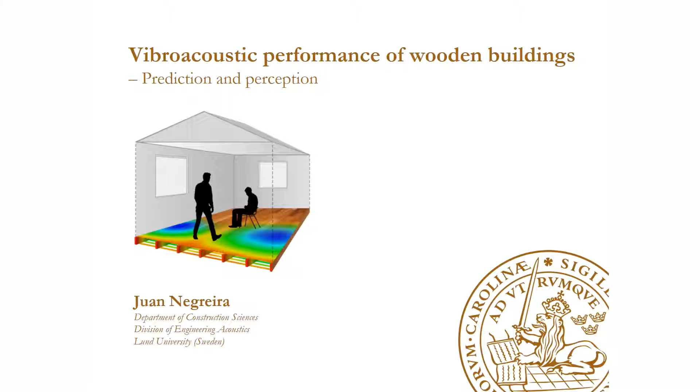as a PhD student. So I'm going to try to do it in a very descriptive and non-technical way. If someone has a question afterwards, I'm willing to happily go into the details.

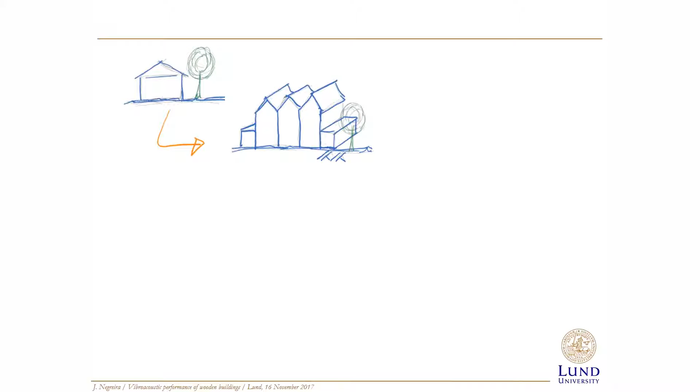But to start with, this is a house which could be made of any material. This is how people used to live many years ago, isolated from each other, growing their own products, going out in the morning, hunting, coming back in the evening. But as society evolved, people started to gather together and create populations. That became even more important, even more evident after the industrial revolution. Then cities started growing and people started living all together, building vertically, close to each other, cities started densifying.

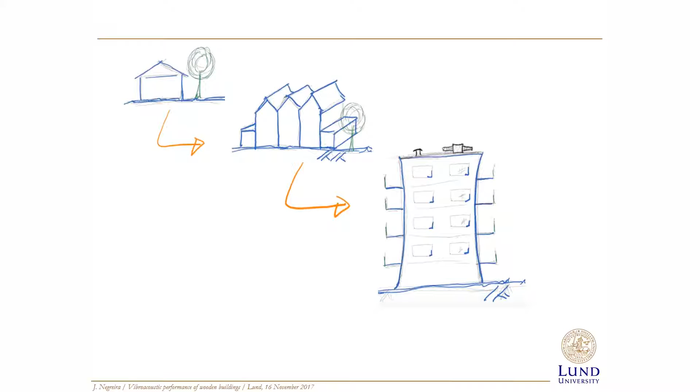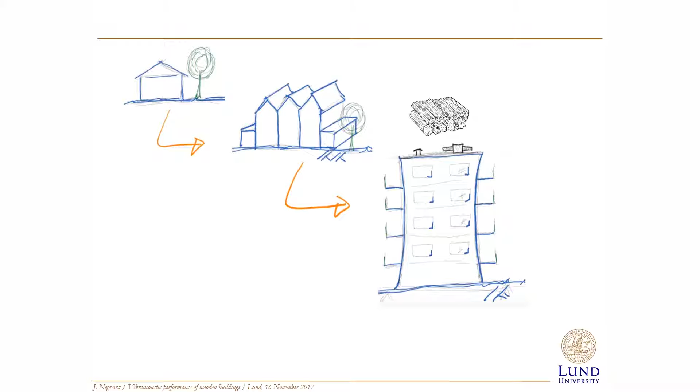And nowadays, especially in Sweden, those high-rise buildings - just because Sweden is the third largest country in the European Union and 70% of it is forest - in Sweden, many of these buildings, and growing, are made of wood. The problem is that even though they comply with the present acoustic regulations, as Nikos talked about before, people still complain.

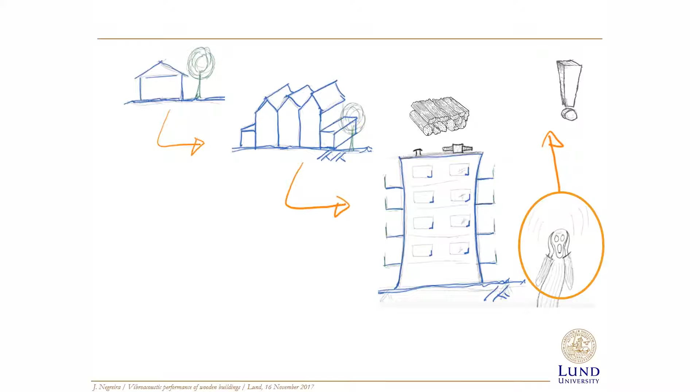They say, yeah, they may pass the regulations, but I'm not happy here. So one first kind of objective of my thesis was to try to understand why people complain about that. So the first aim was to try to find design indicators of how humans perceive vibrations.

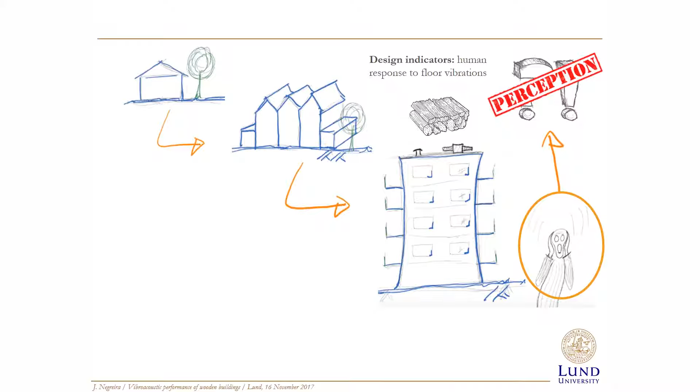I focused quite much on the low frequency range. Well, the other point of my dissertation - you have to believe me on that - but there is a big difference whether in one building we use some type of floors or some other type of floors and stuff like that. Whereas this is quite easy to predict in heavy structures like concrete.

Wood is a natural material. It's very unpredictable. It depends quite much if you have knots, if you have resin pockets and stuff like that. So due to that variability, it's quite hard to predict the behavior of a wooden structure.

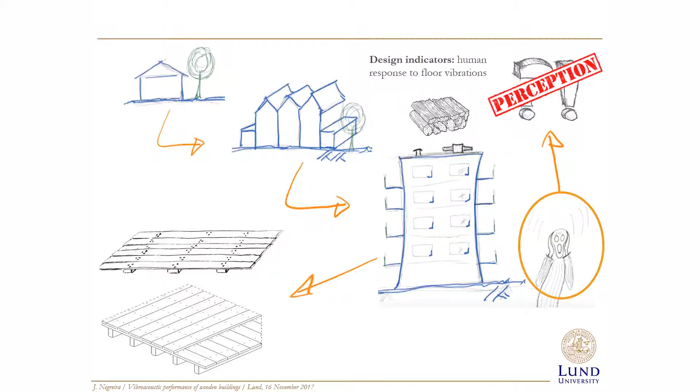So therefore, the second aim of the thesis was to try to create and develop computer models to try to predict the vibroacoustic behavior of these buildings during the design phase. If that ultimately could be achieved to some extent, there would be cost savings for the industry, and ultimately vibroacoustic comfort could be achieved by the inhabitants.

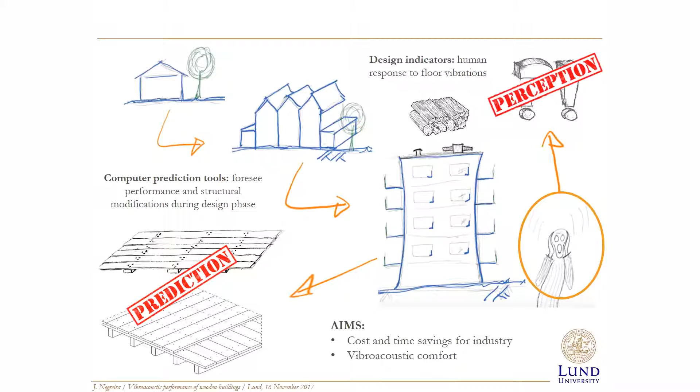So this is everything which was driven at during the 5 years PhD. I will just go a bit more deep into the details. So the title was Vibroacoustic Performance of Wooden Buildings, Perception and Prediction.

So wooden multi-story buildings in Sweden were allowed during many years, but due to numerous urban fires during the 1800s, they were prohibited, and that century-old ban was lifted in 1994. All of a sudden, those buildings started growing in popularity, just increased market share, just because wood is very cheap, is very abundant in Sweden.

It allows a high degree of prefabrication. That means that you can build indoors as in a factory, transport it to the building site and just put up a puzzle as a building, and that is very important in a country with bad weather like Sweden. And it's environmentally friendly, so it has a lot of advantages.

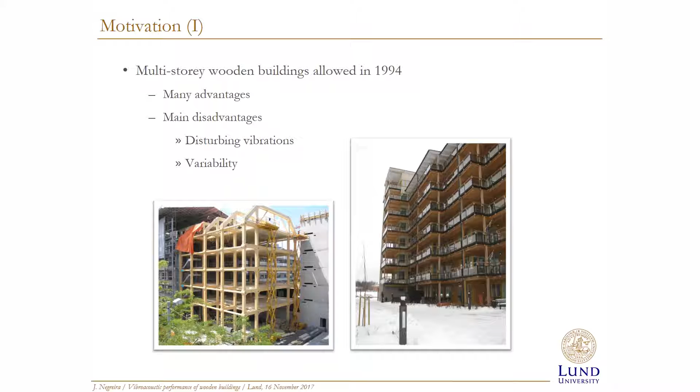But as I said, we have two big problems in the field that I'm dealing with, which is the variability, and due to that, the acoustic comfort. So we can distinguish in any building, but now focused on wooden buildings, two types of sound transmission. One which is called airborne sound, which is where most of the sound energy is transmitted through air.

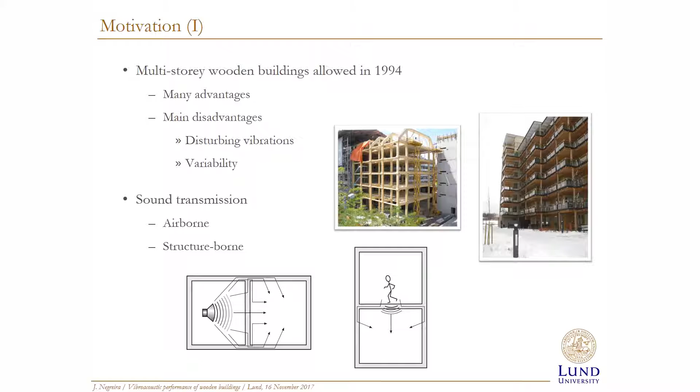I speak, then it goes and my voice hits a wall and radiates to the other room. That is airborne sound. And there is another one which is impact sound transmission, which is the sound that we hear down here when someone up above us strikes directly the floor. It can be people walking, it can be objects dropping, it can be any source you want.

Nowadays, the current ISO standards - and now I'm going to focus on impact sound because it's the one which has more importance, or that is more critical in wooden buildings - the current ISO standards in Sweden, and Sweden is the only country in the world which accounts for frequencies below 100 Hertz.

The only country in the world that counts frequencies from 50 hertz to 3,150 hertz in impact.

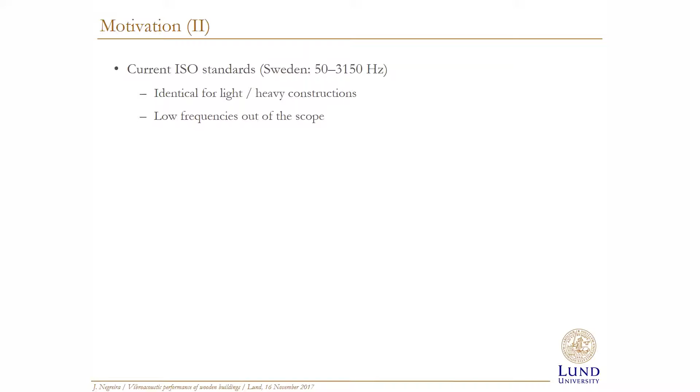The problem with those ISO standards is that they are identical for concrete heavy buildings and lightweight buildings. When they were developed, they were made just for concrete buildings, because wooden buildings were prohibited. So when wooden buildings were reintroduced, they said, but we use the same norms.

The problem is that the low frequencies are out of the scope, frequencies below 50 hertz. That means they're not accounted for, and that could trigger some type of problems.

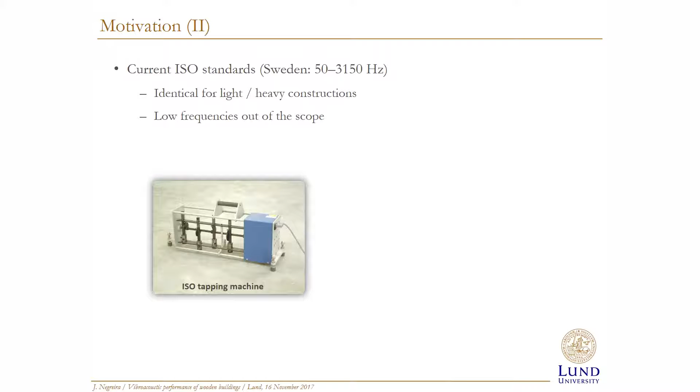This is an excitation source called the tapping machine, which has like 5 hammers that alternatively hit the floor, and then you measure the sound down in the room below. So using this source, you can assess how good your floors are against impact.

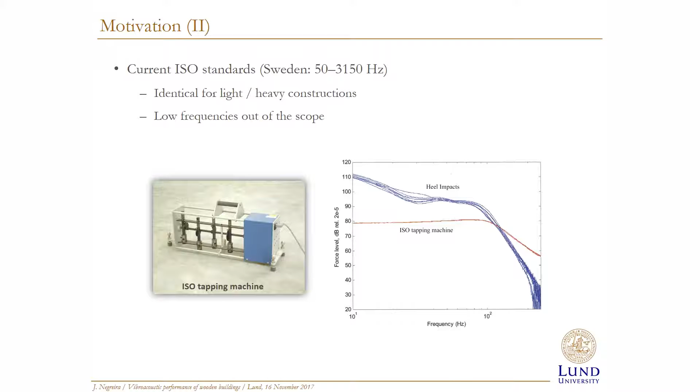If you compare the force that these tapping machines create against daily activities, this is a plot from a Norwegian researcher called Anders Homb. You can see that the force the tapping machine creates underestimates very much the heel impacts from daily activities in wooden buildings. Looking at frequencies below 100 hertz, the daily activities are much higher than what you could evaluate or predict with this tapping machine.

Based on that plot and other things, there was this Swedish research project I was involved in called AkuLite, where we measured impact sound from 50 hertz to 3,150 hertz in wooden buildings, and then asked people via questionnaires how they felt about living conditions there.

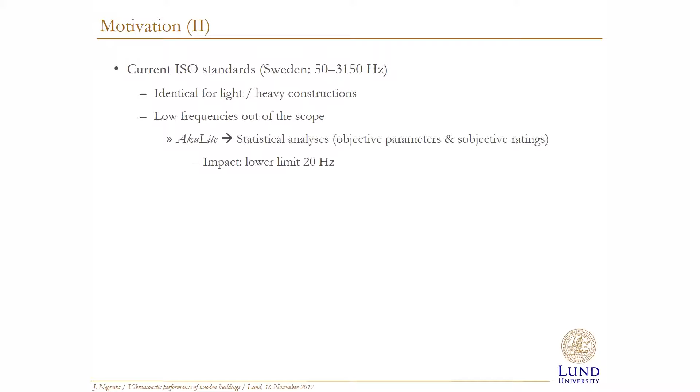If we compare those standardized indicators from impact sound, which go above 50 hertz, with people's responses to questionnaires, the correlation was around 52%, the R-squared correlation statistically. Whereas if you include frequencies down to 20 hertz, the correlation skyrocketed up to 83 or so.

That points out that in wooden buildings, when they are very light and easy to put into movement, low frequencies are of importance.

Then another question is, how do you address those frequencies below 50 hertz? Are those vibrations? Are those sound that you can measure with a microphone? That's another question.

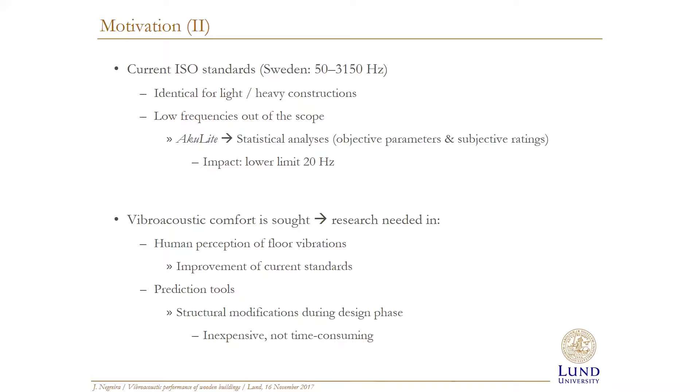The whole point was that if vibroacoustic comfort is to be achieved in these types of buildings, focusing on the low frequency range, we have to dig more into human perception of vibrations, improve the correlation with the standards, and develop prediction tools that can predict the behavior of a building before it's actually erected, saving time and money for the industry.

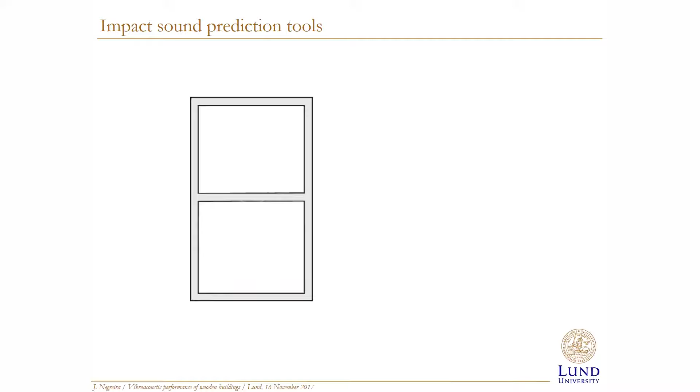So if you are to develop a prediction tool to see how people perceive sound, you have to work on 3 aspects. One is the excitation sources. If we are to create computer models that predict the actual impact noise, how do we model those sources accurately in the computer?

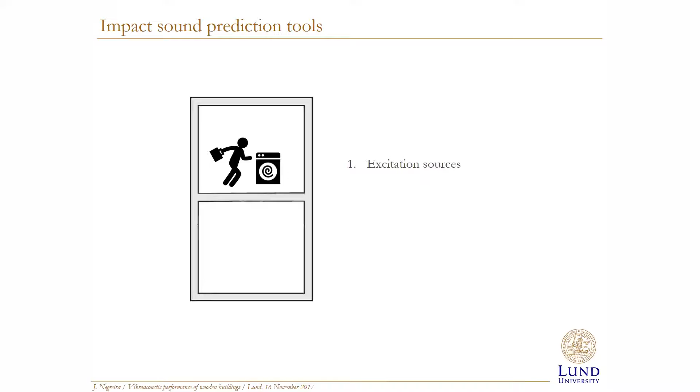Second, how do we model the floors? Wood is a very orthotropic, variable material that has to be thoroughly thought through, because it's not that straightforward, it's not homogeneous. So one has to dig into how to model the actual floor construction.

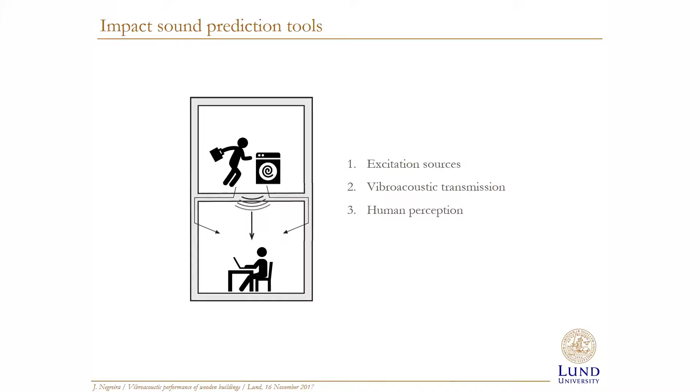Third, once that sound travels from the excitation source to the room below, how do people perceive that? This is a graphical summary of what I did during the PhD dissertation, which I'll come back to during the whole presentation.

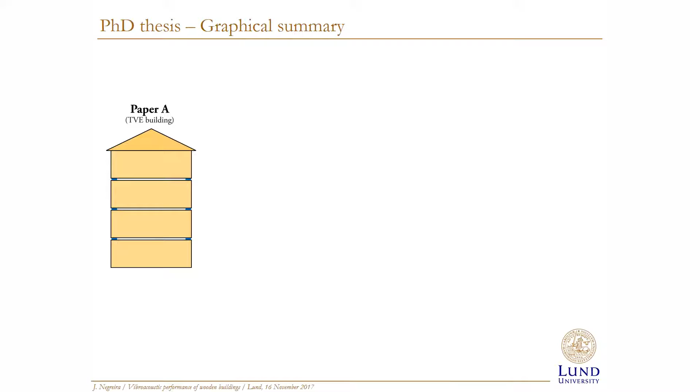But we tried to start at the big picture: I'm going to model a building. The first conclusion was, you cannot do that, this is too complicated a thing. So take a step back and look into different details before trying to put up a whole building.

So in one of the papers, what we looked into was some kind of elastomers. In the first paper, paper B, what we looked into: normally a wooden floor is made of a flat surface, and then you have beams and stuff like that.

The calculation time of those floors, when I put some kind of excitation in them, will depend very much on what you model. So the first thing was: in order to be accurate but not spend too much time, how much level of detail do we have to consider? Do we need to model the air between the cavities, between beams and plates? That was one thing we looked at.

The second thing was that there are a lot of modern constructions, types of buildings that use some type of rubber materials between floors and walls in order to reduce vibration transmission, flanking transmission. This is a quite complex material, so how do we model that?

The third step was to take a junction, which is where a lot of difficulties happen when beams meet on top of a plate, or a plate, or two plates meet on top of a beam. How do we address these types of junctions, and how do we address it in a simplified way?

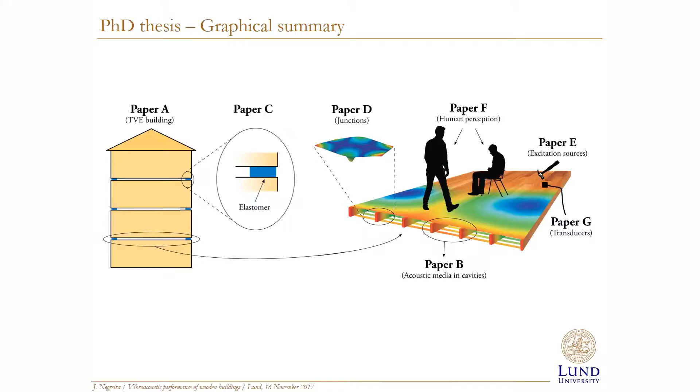The next step was how to model the excitation sources. And the last one was the transducers - how do we measure? I won't talk about this, but most of the measurements we did during the thesis were done by accelerometers that we developed and calibrated in-house ourselves.

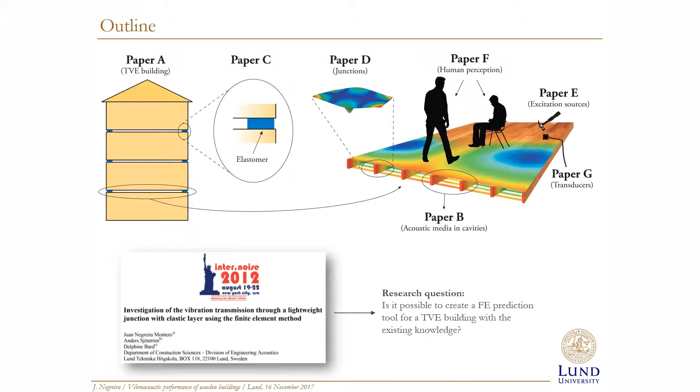So I'm going to go a bit more into detail now, just one slide for each paper. The first paper's research question was: is it possible to create a prediction tool, a finite element prediction tool, for this type of building with existing knowledge? As I mentioned before, the answer was no, it's not possible.

What we have here is a building made of boxes stacked on top of each other. I didn't believe it the first time when they told me these type of timber volume elements are boxes stuck on top of each other. I said sure, but they really are - we went to the factory and they're boxes which have all appliances and furniture inside. You just come to the building site, stack them on top of each other, and put some type of elastomers in the middle to reduce flanking transmission.

Compared to traditional buildings, where if you apply a force on the upper floor it goes directly through the partition and also through the walls, in these types of buildings you force the vibrations and sound to go through the flanks, and hopefully you reduce it with those elastomers.

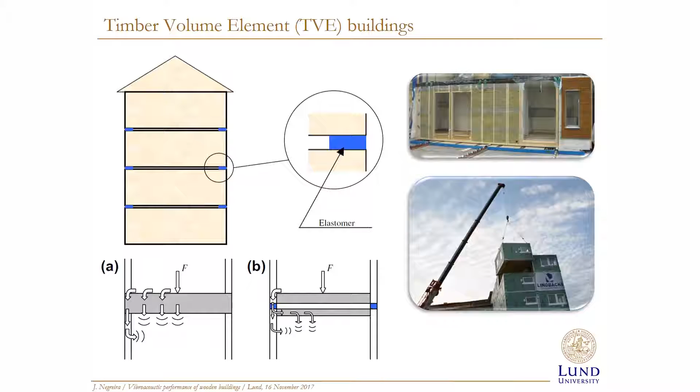What we tried to do was compare this TVE building with a normal building. Here is an extract of some results. We put a model with 2 boxes - here's a cutout of that model - put a force in here and measured both vibrations going up on this wall and going down.

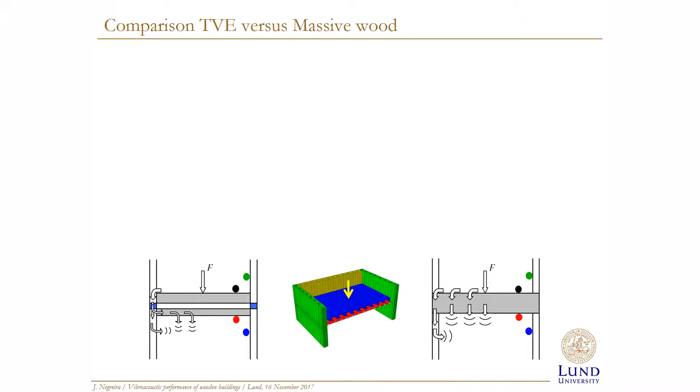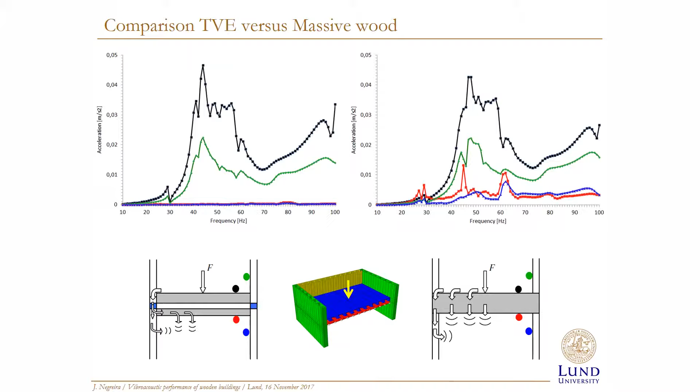If you look at the red and blue lines here, you can see on the left that these lines lie totally at the 0 level. That means we have total reduction of vibrations, but we know from measurements we've performed that this is not the case. So the main conclusion was that this is an unrealistic behavior.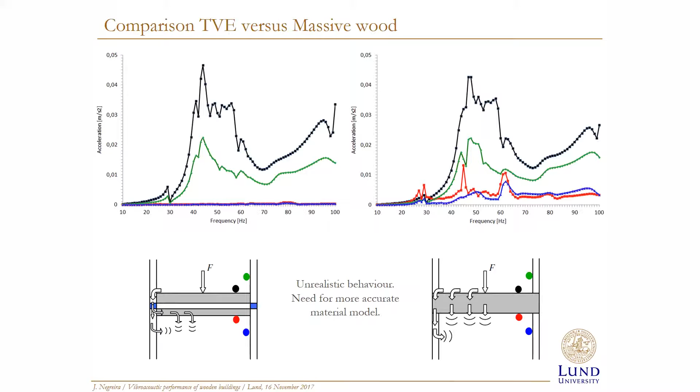We need to take a step back, as we said, and look more into the details - that's what we tried to do. The second step was to look at the acoustic medium in the cavities.

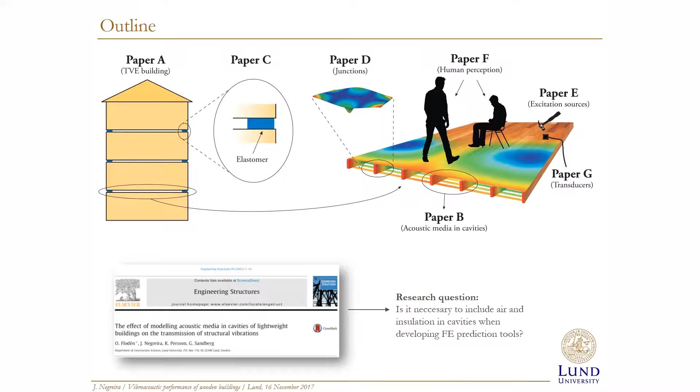Is it necessary to include air and insulation in the cavities when developing these prediction tools?

The fact of simplifying the models or not can actually save a lot of calculation time. We're talking about models that could take a week or more to calculate. That's why it's important, if this will eventually be used by the industry, time is money, to come up with as many simplifications as possible while still keeping the accuracy so they can rely on it.

So, let's see if this works here. What we see is a scheme of a model, a module on top of each other. We apply a force here, and then we measure or evaluate it in the room below.

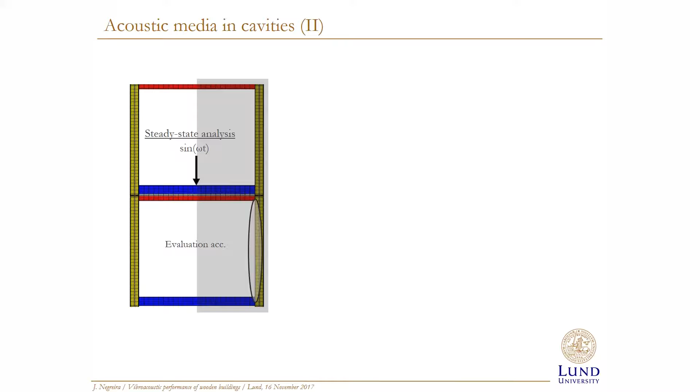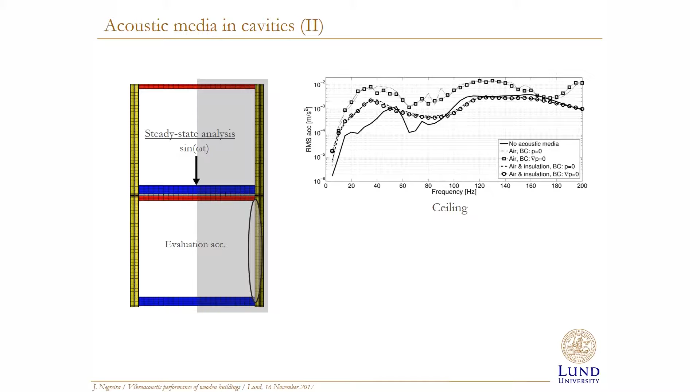We tried a lot of different models, how to model the insulation, how to model the air, many different things. This is just one example of a result, and the main conclusion was that yes, you actually have to consider air and insulation when creating and developing finite element models.

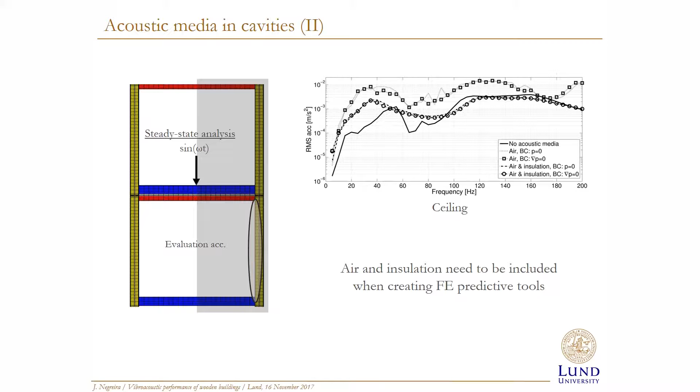That was not good news, because it means you have to spend a lot of extra time with the modeling and a lot of extra time in the calculations.

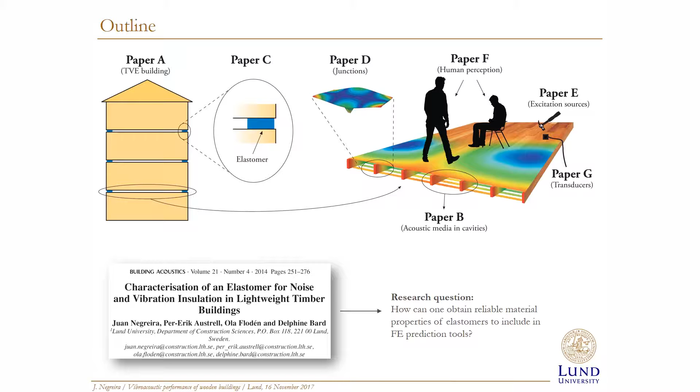The third thing we looked at was how to obtain reliable material properties of elastomers when we put them into those models, because if we are to model real buildings, we will have to model elastomers. So normally when you buy an elastomer, we focus here on one you can see how they can be used. This is just a support we made in the lab with elastomer, which you can put between two pieces of wood.

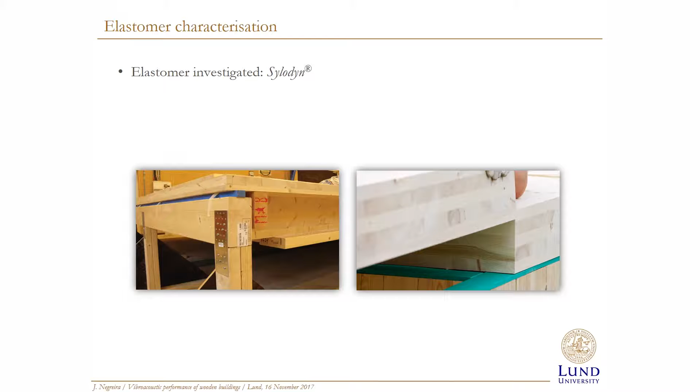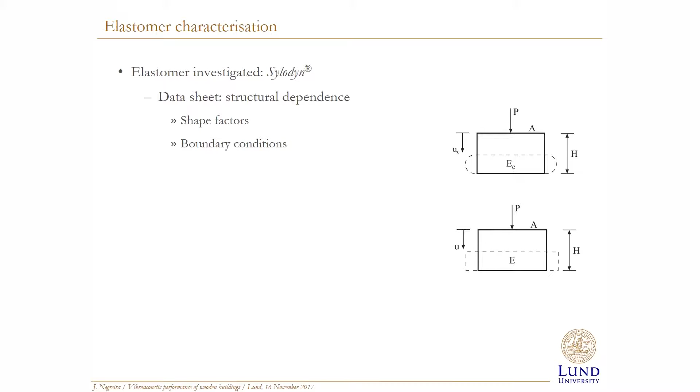Normally when you buy one of those, what you get is a kind of catalog, a data sheet of the product, and the properties you get there are very much dependent on the conditions the tests were performed under. What you want are not material parameters that are test-dependent; you want material parameters where you can actually model different and arbitrary sizes.

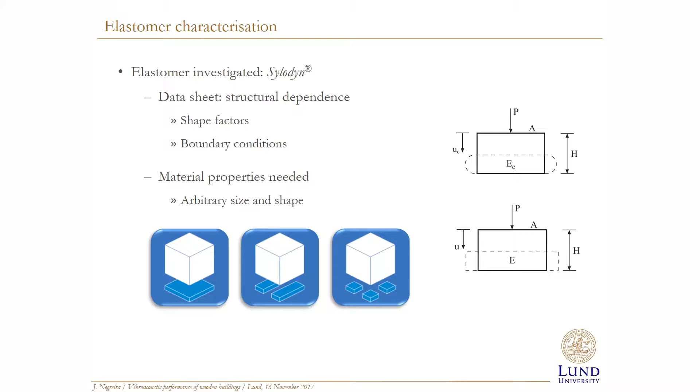So what we did was try to develop a characterization method where you have properties that have nothing to do with the data sheet, because sometimes if you want to predict how the building will perform, you might say, okay, I'm going to try a strip, or I'm going to try blocks instead. In order to do that, you need material parameters which you don't get from the data sheet.

So what we did here was develop something that, from that test data, gets us the material properties that we want.

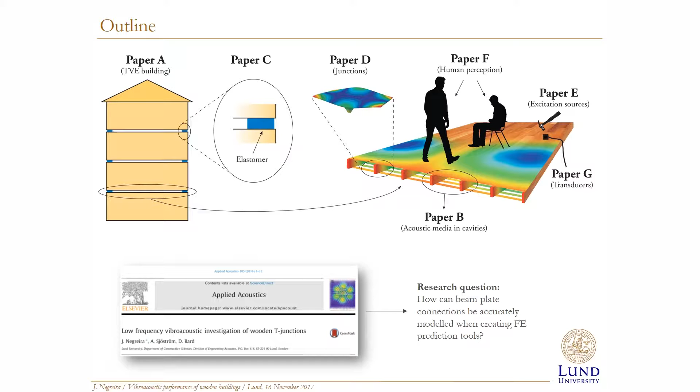Moving on a bit, the next thing we looked into: now we know we have to put air in the cavities, we know we have to put elastomers between floor and walls. The next thing is these beam-plate connections. How do we model them?

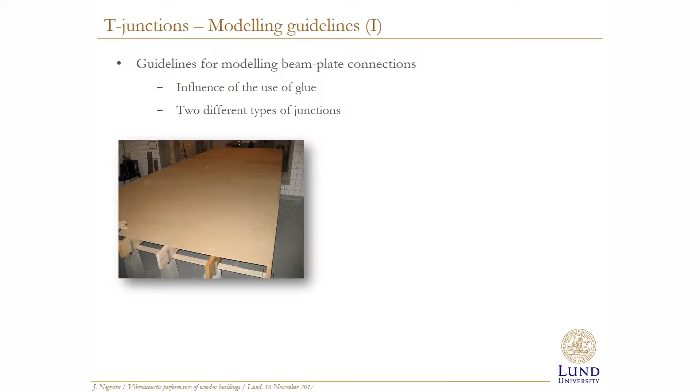If you look at a floor like this, a lab test we did, it's basically beams with a secondary space boarding and plates on top. You can't see it, but you have to believe me, there are two types of junctions in that floor: two plates meeting on top of a beam, and one plate going over a beam.

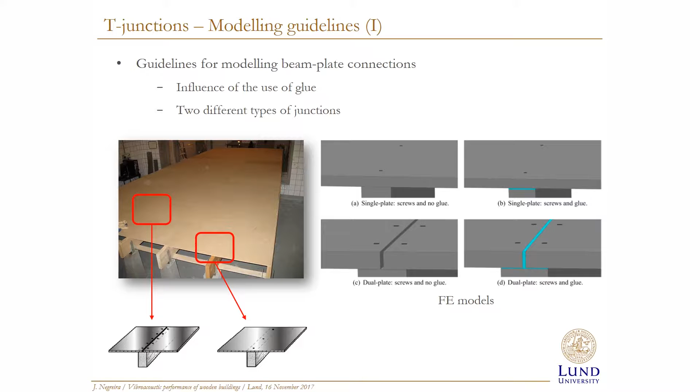So what we did was create computer models with different configurations of these junctions, with or without glue, because normally in this type of floor you use screws and glue. If we can avoid modeling the screws, or avoid modeling the glue, that would be a big time and cost savings, as I said before.

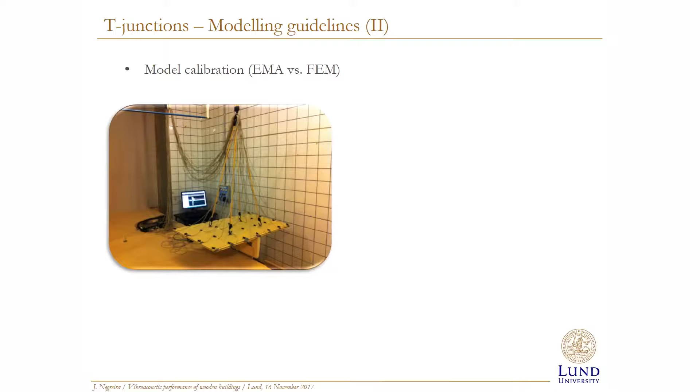So what we did was create a cutoff of a real floor. We put a lot of accelerometers on it and performed measurements. After those measurements, we modeled that T-junction in the computer.

Once that junction was validated, we played around with it. We modeled the glue, added it in, and studied the differences between the model results. Since my first model was validated, we reasoned that the relative differences would also hold if we played with the models instead.

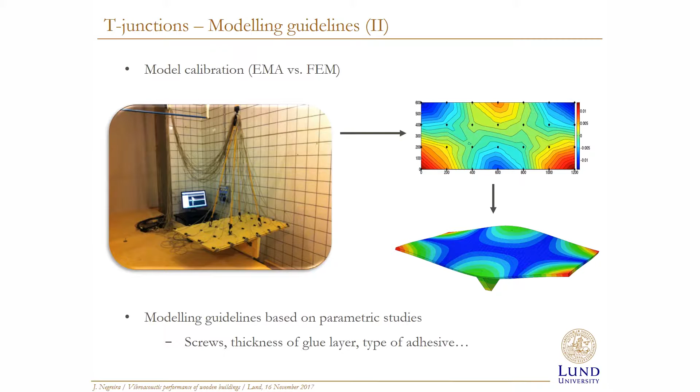So the result of that study was to create guidelines based on parametric studies on the screws, on the thickness of the glue layer, on the type of adhesive, on whether one should model it or not, and things like that.

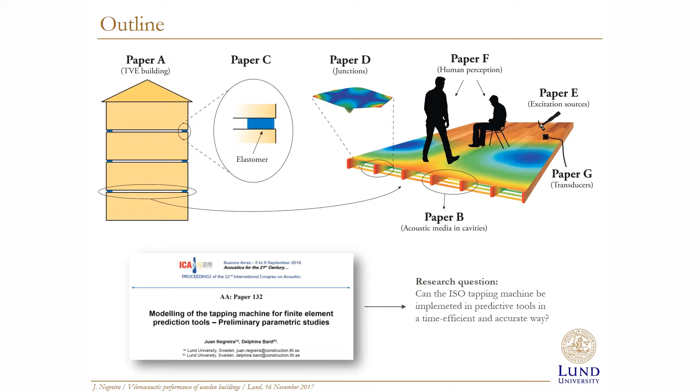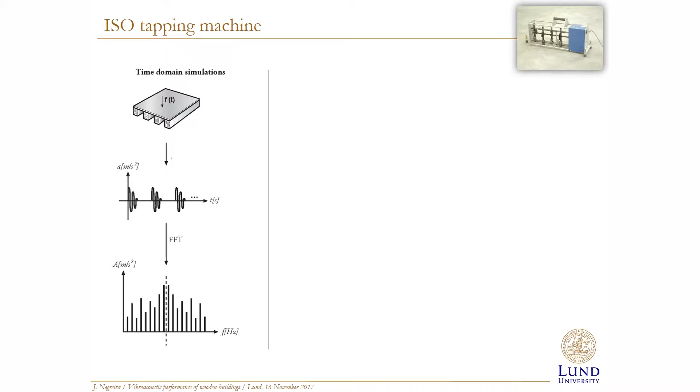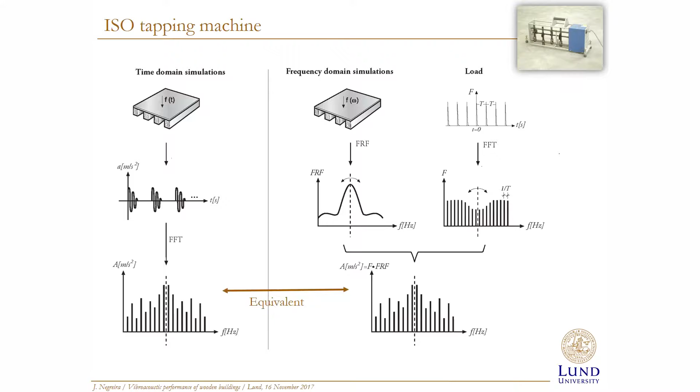One other thing I mentioned at the beginning is the excitation source, which is something you have to look at. What we did here was implement the tapping machine, a standardized source in the models. I won't go into detail, but we tried to save time. Normally, time domain simulations take a lot of time, but we proved that by doing it in the frequency domain with some different scaling, you get the same results. Basically, we tried, in the same way as before, to cut down on details to gain time.

Here it was more or less the same: try to model this source, but lowering the calculation time.

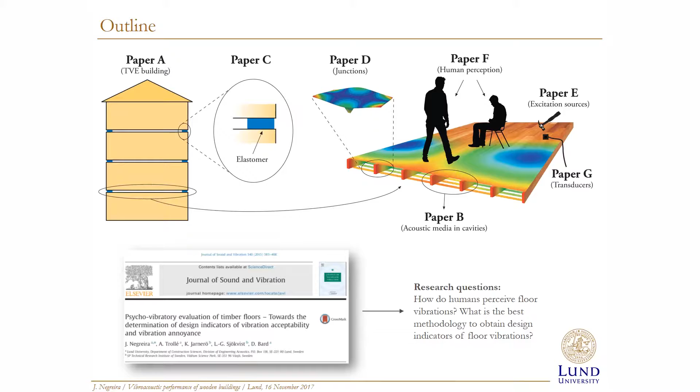Finally, we focused on how people perceive vibrations, so we call it a psychovibratory test. We put 5 floors in the laboratory, real floors delivered by manufacturers, and did 2 different tests: a seated test and a walking test. In the first walking test, we had about 60 people participating across the 5 floors.

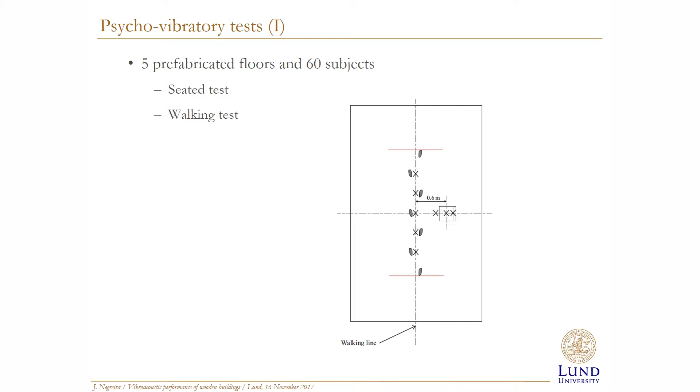In the first test, we told people to walk back and forth between two lines, measuring the accelerations they created with accelerometers placed at those crosses. After they walked back and forth, we gave them a questionnaire asking how they felt about the vibrations and the noise they created, very much along the lines that Nico presented in his study, but applied more to vibrations.

The second sub-test was a seated test. The test person was seated on a chair, where we measured the vibrations they were exposed to at three spots: the backrest, under the chair, and between the feet. Then I or another colleague walked back and forth, and we sent another questionnaire asking how they felt the vibrations we created for them while seated.

So here you have two pictures: me performing the seated test while Anders, my colleague, was walking back and forth, and me being ready to walk between the two lines.

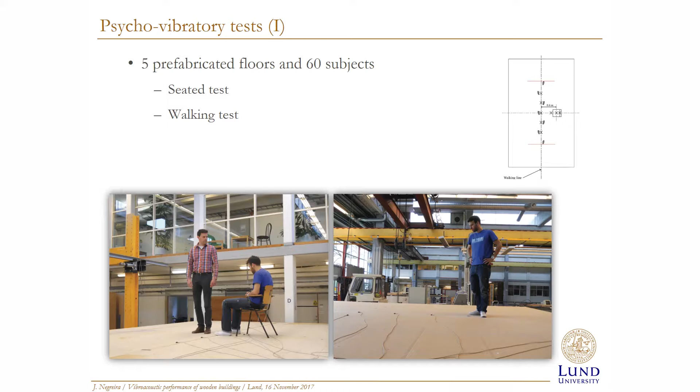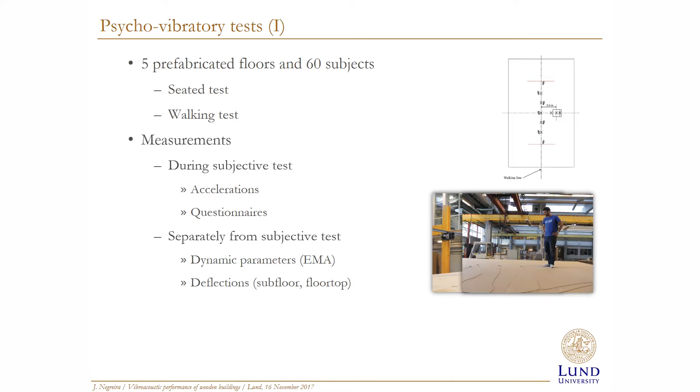During the subjective test, we measured accelerations that people were creating or exposed to, and also sent out questionnaires to them. Apart from that, we measured objective parameters of the floors, dynamic properties like eigenfrequencies, eigenmodes, damping ratio, and so on. By doing statistical analysis and massaging all the data, we came up with some design indicators.

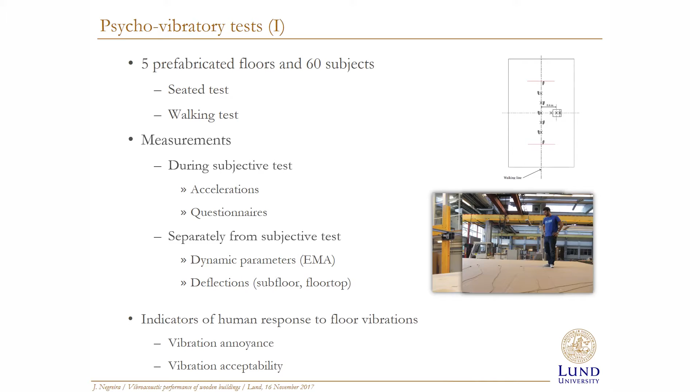For floor vibrations, if you follow this, people will not be annoyed, and it will be accepted from a vibration point of view. If you go over that, it will not. So these are some kind of indicators. I should point out this isn't written in stone — it was just 5 floors — but at least it showed trends to follow.

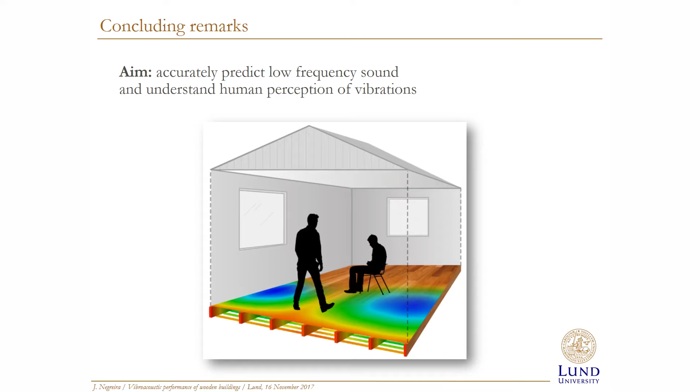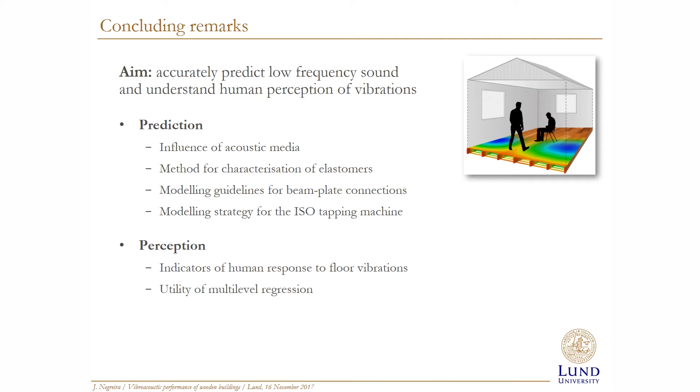So to conclude, the aim of the PhD project I was doing was to predict low frequency sound and understand how humans perceive vibrations. We did research on the prediction side by looking into elastomers, air cavities, connections, and excitation sources. Efforts were also put into perception, coming up with design indicators for vibration annoyance and vibration acceptability. Finally, there were measurement techniques, sensors, and transducers we developed that I didn't talk about here.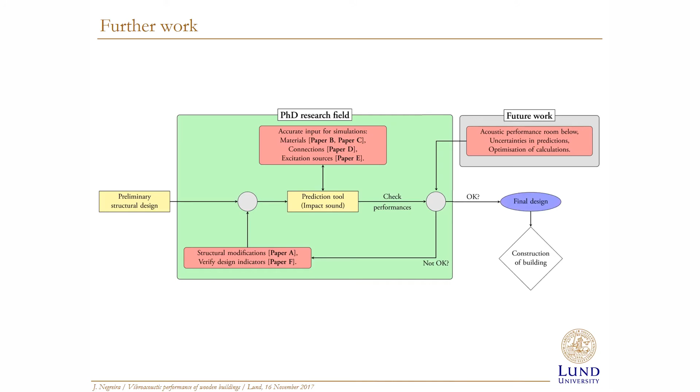This green box summarizes a bit what we did in these research fields. So, that's done — but we're still working now on how to assess uncertainties a bit more, and how to optimize calculations to reduce time further, with model reductions and similar approaches. Once that is up and running, you'll probably be able to predict the behavior of a building, and people will be happy. So thank you very much for your attention.